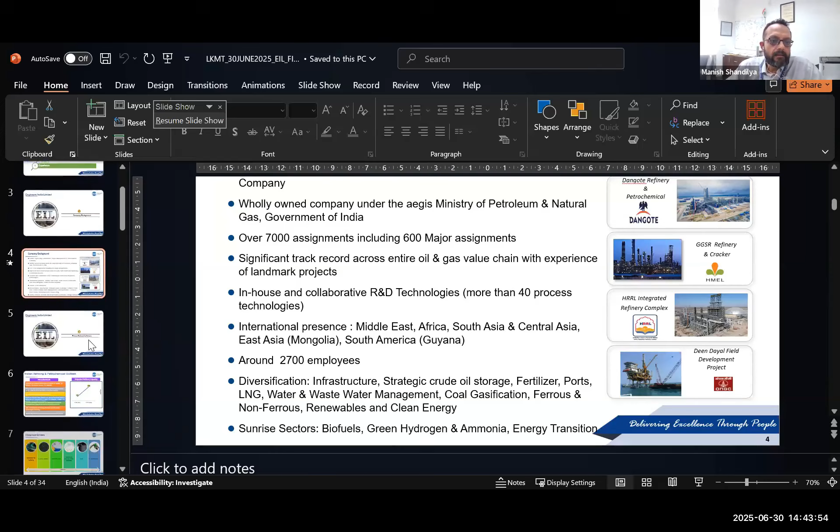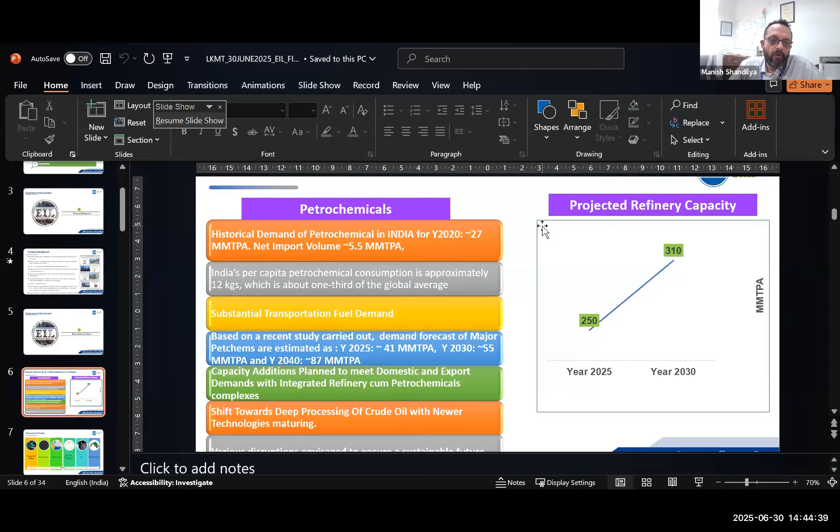So, a very brief perspective on the need for petrochemicals and refinery to come together. Historically, the demand for petrochemicals in India for the year 2020 is about 27 MMTPA. We are still at about 1/3 of the global average, which for us is about 12 kg. We still have a substantial transportation fuel demand, and we expect this petrochemical demand to jump from 27 to about 85-87 in the year 2040, for which capacity additions have been planned, are underway, or under study for domestic and export demands, as well as for the integrated refinery petrochemical complex. The shift is towards deeper processing of crude oil, and there are various disruptions being considered as part of our studies when we look towards a sustainable future.

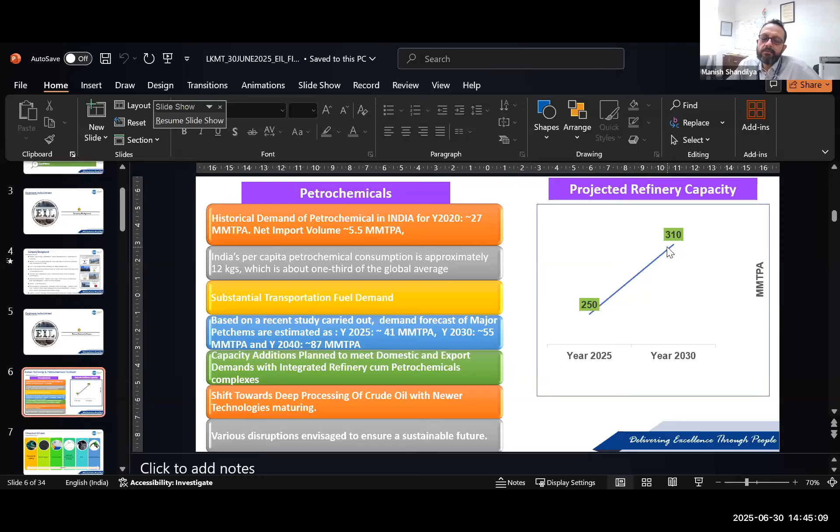As per the knowledge available with us right now, can you see that today we are almost at 250 million tons of crude throughput, and by year 2030 expected to be about 310, and there are projections for 2040 of about 400 MMTPA. And now, as the people in the industry are very well aware, besides the fuels, to make the refinery and the crude oil profitable, it needs an integration, or some petrochemical products have to come out because of the differential of the price.

So historically, the refineries were driven very early on by kerosene and fuels. Environmental aspects were always there. The crude prices were high. They are still so. There was a crude flexibility to be built in, and bottom of barrel was being addressed by the methods of coker, and before that visbreaker.

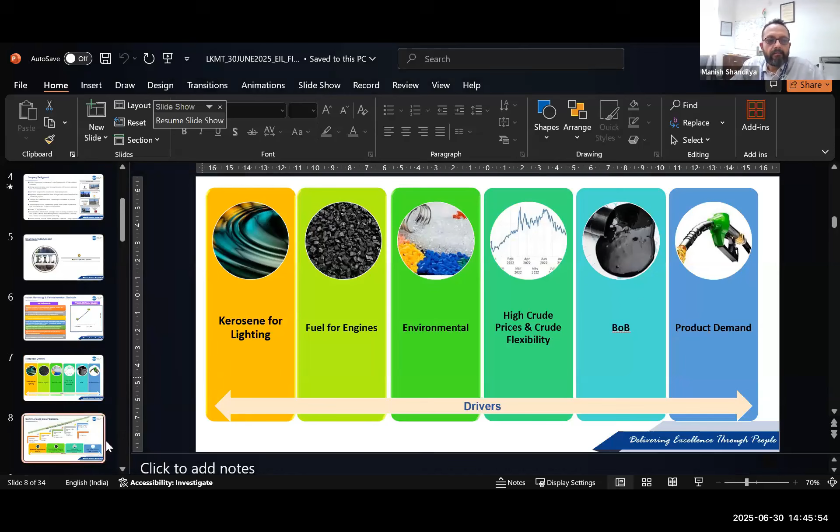Now, as things have moved ahead, we have moved away from visbreaker to delayed coker, two delayed cokers, petcoke going to the CFBC, then the delayed coker bottoms being connected to petchem, to petcoke gasification. Now we are looking for vacuum residue hydroprocessing, so that we can go as low as converting to a maximum of nearly 10% of the bottoms, or integrating it with the coker and still bringing it down to 10%. So these drivers are now the refiners nowadays, and in the coming years, targeting to eliminate high sulfur fuel oil. There are environmental concerns which are forcing the petcoke disposal options.

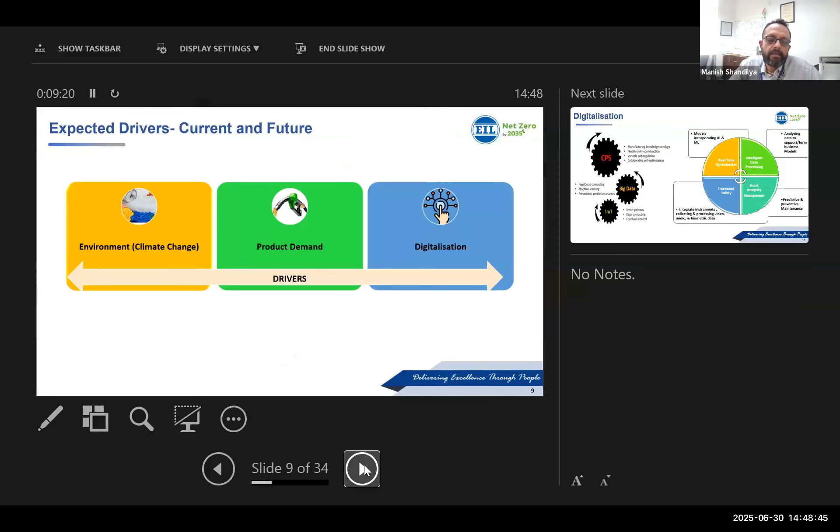There is an increase in petrochemical demand, and then again the prerequisite, the consideration of high crude prices and crude flexibility, is still there. So the expected drivers now, whenever we are configuring, are the environmental changes that are getting imposed, the product demand is altering, and there is a huge requirement of digitalization. The digitalization which is being built in right now is basically using real-time optimization, intelligent data processing, asset integrity management, and increased safety. So there is an increased incorporation of AI and ML models.

The projects that we are executing right now have a demand coming in from the client, and these are being done. There is an integration of instruments which leads to the collecting and processing of video, audio, and biometric data. And there is a built-in predictive and preventive maintenance. So these are the things which we take care of while we are configuring the current refineries.

Looking ahead in the future, increasingly the refiners are asking for utilization of green hydrogen, for carbon capture, for considering plastics into fuel oil as a feedstock, recycling, definitely integration of oil refining, and also the need of integrating biorefineries and utilization of renewable power. This is helping the refiners, besides being integrated with the chemicals, to become smarter, efficient, connected, more reliable, which brings better margins to them and increases sustainability.

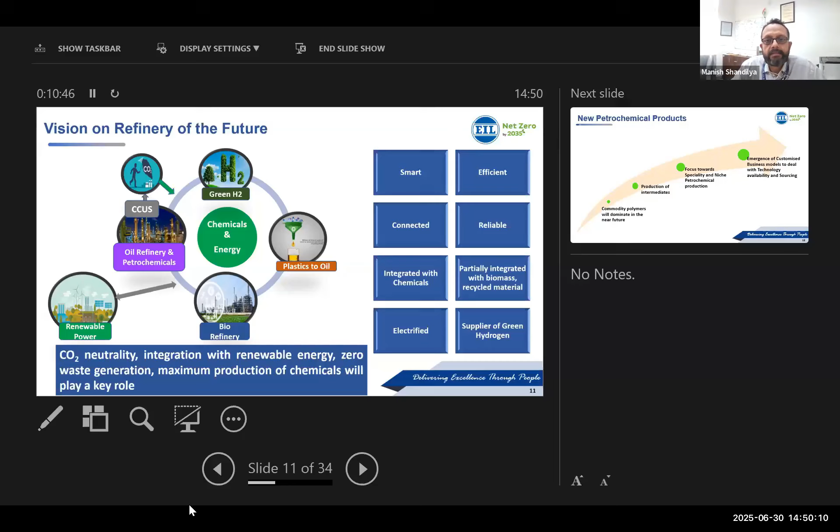Now, up till now, most of the companies were focusing on the bulks. Interest is being shown by the refiners to accommodate niche petrochemical production right away in the initial configurations, and the niche petrochemical production is bringing in the challenge of emergence of customized business models to deal with technology availability and sourcing. Not all technology suppliers who are in this business are willing to be a licensor. They want to be a participant, a part owner in one way or the other. And that is something which the refiners and the operators are increasingly having to deal with. Some of the refiners have already successfully incorporated these, and the new refiners are considering developing the systems in their organization to work with these environments.

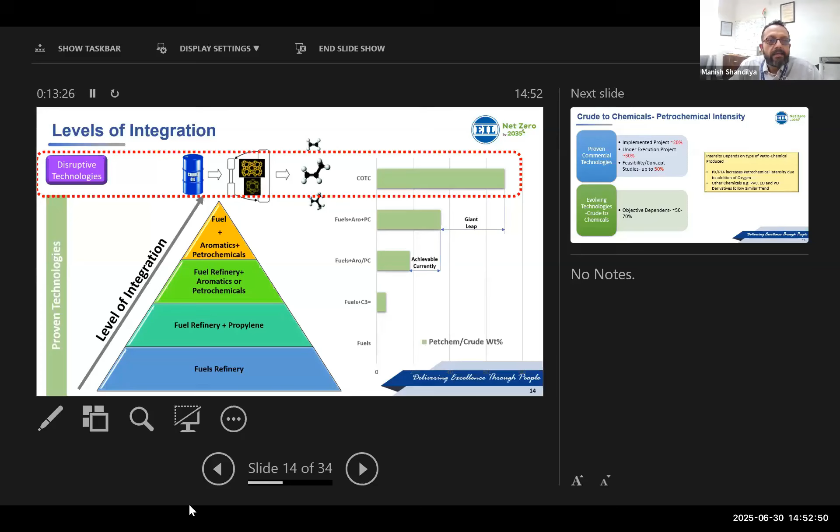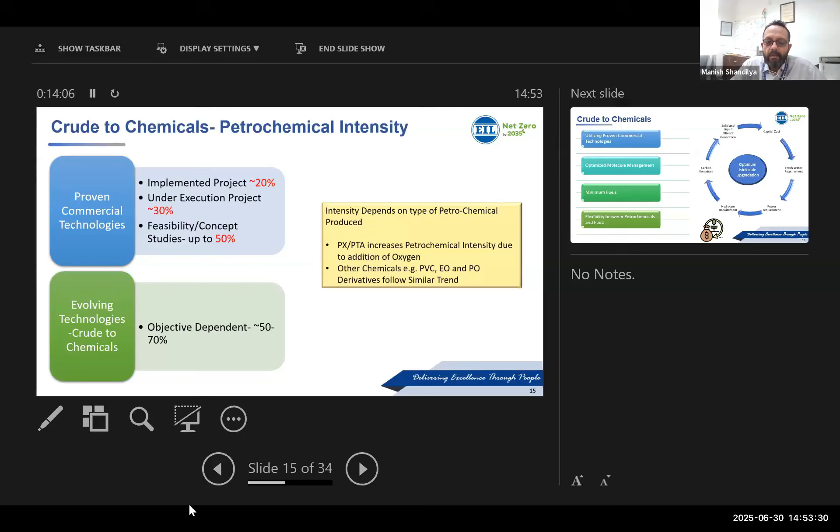So, in brief, the projects which we have implemented as EIL for petrochemical intensities are right up to 20%. They are already operating. More than 20 to 30%, they are under construction. The concept studies are going to 50%, and depending upon the objectives, we have tried to hit beyond 50 also. The intensity would depend upon the choice of the petrochemical that is considered. For example, PX-PTA. Other chemicals could be PVC, ethylene oxide, propylene oxides, which could also help in increasing the intensity much higher, in the realm of 50%.

So the way we go about doing it is utilizing thus far proven commercial technologies, optimizing the molecule management, minimizing the fuels, and still keeping the flexibility between petrochemicals and fuels, because there would be scenarios of shutdown, or downturns in the commercial cycles. And this requires the balancing of the capex, water management, power, hydrogen, carbon emissions, and the solid and liquid effluent generation. Once you integrate this, the capex rises substantially, which has to be very effectively managed to stay profitable by capturing or allocating the molecules properly.

So then there are two ways one can approach it. One is integrating it into an existing refinery or building up the refinery and petrochemical complex together. The moment one brings in the integration to an already standing refinery, there would be challenges like the processing of low carbon intensity residues. There would be integration of HGU and FCC. There are needs of converting the hydrogen, as the cracker is a big creator of hydrogen. So there would be hydrogen level integration, plastics to oil recycling, electrification of drives. Right now, there is contemplation of electrification of furnaces, though still at a demo stage.

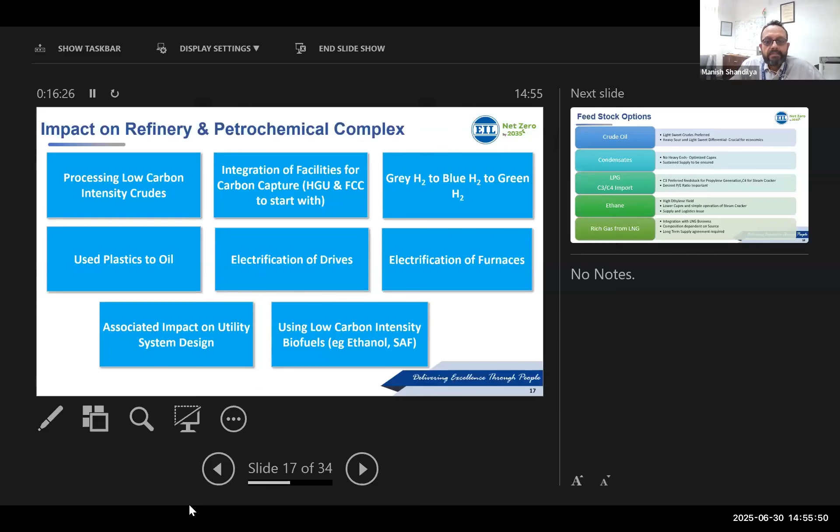So the feedstock options that get explored in this integration are, for example, starting with crude oil. The light sweet crudes are preferred. However, the heavy sour and light crude differential has to be built in for the economics. Condensates also; they do not bring the heavy ends, so the capex gets optimized, but the challenge comes from a sustained supply of condensates. LPG and C3, C4 would be the most preferred feedstock. However, again, it's the availability of these feedstocks which is a challenge, and hence the balancing of the P/E ratio in the cracker and the FCC has to be managed, because very rarely will it be possible to have a light cracker. More often than not, when we are integrating, we will be bringing in heavy streams like kero and diesel. So the design of the furnaces and choosing the right P/E ratio becomes important.

Interest has been shown by operators to bring in ethane directly, which gives the highest ethylene yield. But again, there is the consideration of supply and logistics, and though the operation of the cracker becomes simpler, this kind of cracker does require higher utilities compared to other crackers. The fourth option is the rich gas from LNG; there are already crackers operating in the country. This again requires the sourcing chain. So basically the message here is that the feed to the refinery starts changing. However, the refinery also has to satisfy its primary requirement of servicing the fuels demand. So that's a challenge wherein the design of the complex needs to have a wide spectrum, so that it can take care of the market economics while keeping itself profitable.

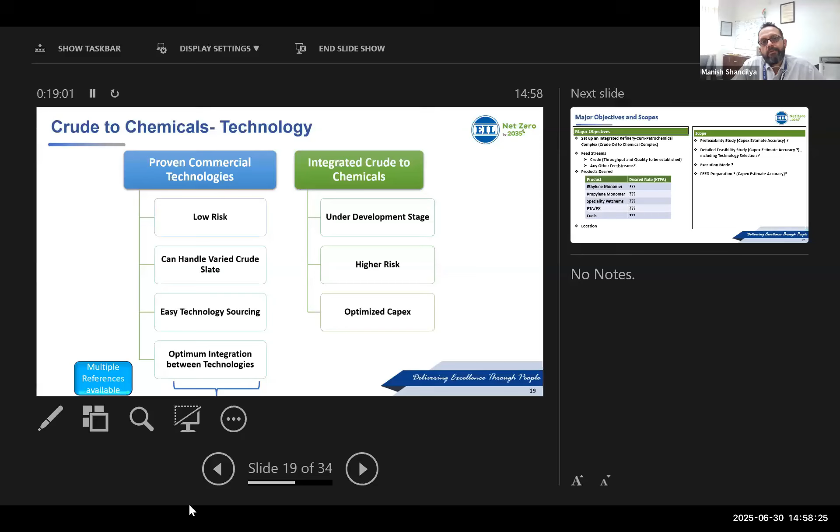However, there is a lot of interest in integrated crude to chemicals because it brings a much higher petrochemical intensity. For example, this is a very high-level template of what needs to be in an operator's mind, what bullet points have to be there. The first thing, obviously, is to set up an integrated refinery cum petrochemical complex, or to put a chemical complex onto a crude oil complex. Then the crude throughput and quality need to be iterated, and the diet has to be established.

Whether there are any other opportunity feed streams, for example naphtha, LPG or ethane, that the refiner or operator can source. The products desired, the primary being ethylene and propylene monomer. Are there any specialty petchems on the horizon? Whether PTA or PX is a thought process, and one very important thing is what kind of fuels the refiner would like to service as a base demand.

The location becomes extremely important. We have seen operators moving to various locations, not just for fiscal incentives, but also to make the logistics of the incomings and outgoings favorable to the complex. Then come the stages it has to go through. Typically, it goes through a pre-feasibility stage. The capex estimate we have seen at this level could be as good as 30%. Some people have also opted for close to 50% for a pre-feasibility.

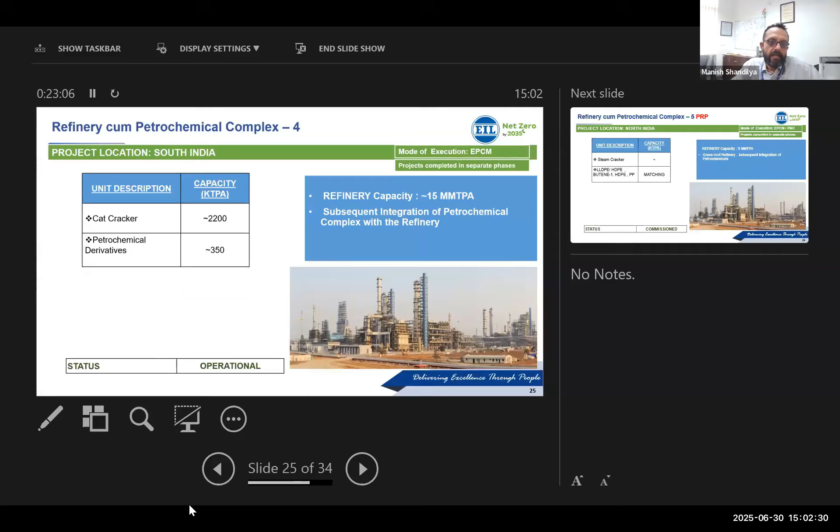Then there's a well-known petrochemical complex in the west of India that has been raised to 25% with a steam cracker of 1000. Here, the FCC and the steam cracker have been integrated with C2, C3 valorization, still focused on the bulks. And a complex in South India, where the cat cracker C3s, which traditionally go to PP, have been taken to petrochemical derivatives like oxo alcohols and acrylates. So these are projects in the 20 to 25% range.

EIL is presently engaged in studies which are greater than 30%, as well as hitting above 50%. These are at various feasibility levels right now, and are being done with conventional technologies, employing bulks as well as specialty and niche derivatives. These are only at the study stage. Some of them are at PFR, some at DFR, and some have progressed to technology selection. So in a year or so, we'll probably be talking about BDEPs in a few of them.

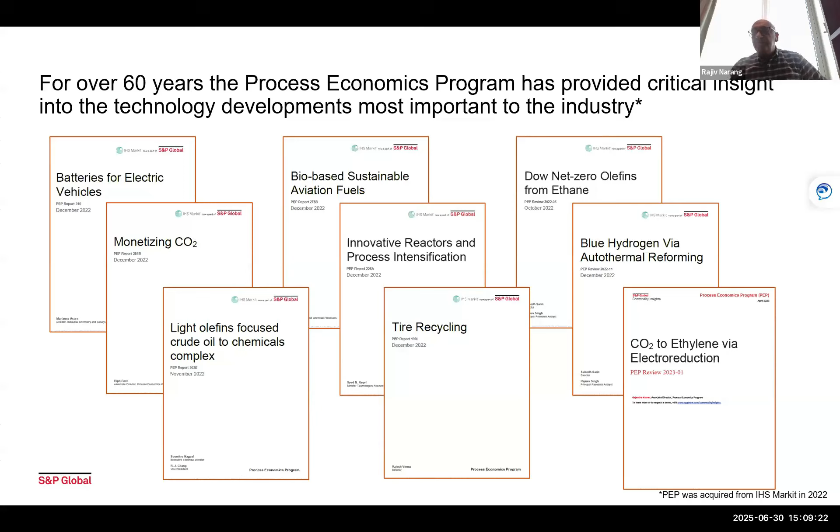And it has got over 2,100 processes in its inventory. So that's always interesting too.

Okay, I'm going to minimize my screen. I have a small screen. So Ajay, please flag it up if something goes wrong.

SMR, small modular reactors, carbon capture mineralization, and efficiency of a particular plant, and why we should be looking at this as low hanging fruit. Now this is not really disruptive, but I think it's important from the point of view of public policy. But every technology in the various boxes is important. The big message is there is no one silver bullet to decarbonize a plant.

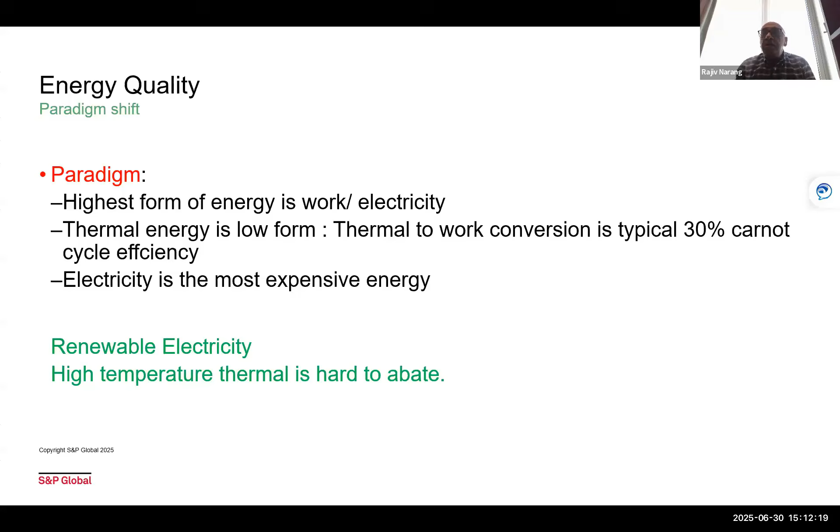And the second paradigm shift is high temperature thermal is hard to abate. We can see that in cokers, in crackers, in hydrogen reformers. What is stopping us is actually the high temperature thermal heat. Electricity has still not made its way out there, but it is trying to. And here is an example. Electrification of crackers is under development, is what we have found out.

The people who are working in this field are given on the right-hand side: Linde, Shell/Dow, Technip. And the most interesting to us is the Coolbrook rotating cracker, rotodynamic reactor technology, which is in pilot scale. But what I would like to point out is, if you look at the electric furnaces, that's more than half a gigawatt, so 600 megawatts.

And we still have to do some fuel firing of 74 megawatts. And all this is renewable electricity. This is for a 1 million TPA ethylene plant. For a 1.5 million TPA ethylene plant, typically you need a gigawatt of electricity, which has to be renewable and has to be robust 24/7. And that, I think, is a big challenge sitting with us.

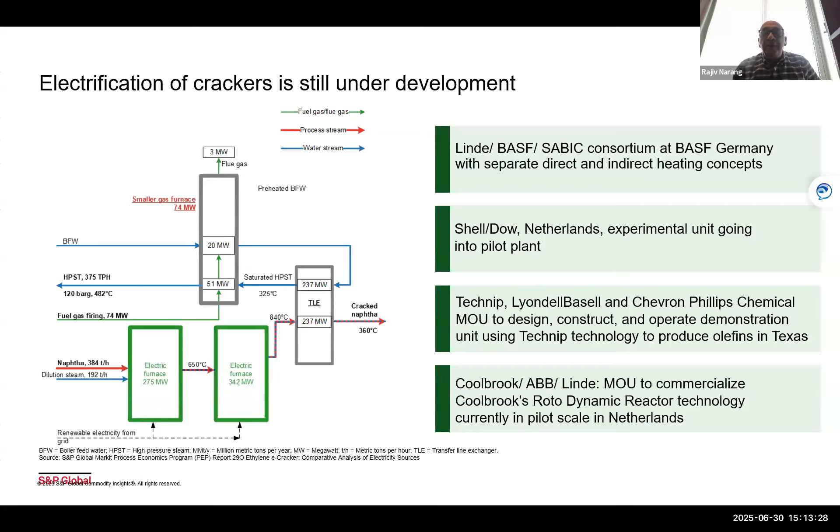So talking about efficiency, the first technology, and I'm cheating here. It's not really disruptive. But I think it needs help, and it works together with renewable electricity, which is claimed to be plentiful and cheap. Why would anyone spend money to change a compressor? The typical highest consuming rotating machinery in a plant is a compressor. It runs in megawatts mostly, pumps probably in kilowatts.

And why would I want to change a compressor from, say, steam running today to a variable speed electrical with a very high efficiency? The only way I can do this is if somebody puts a carbon price on it. The price of carbon has not yet been put in many countries, except maybe in Europe, where we have a carbon trading scheme, and maybe South Korea. If we put a carbon price on the CO2, or we legislate it like we did for sulfur, we just said not more than 10 ppm in gasoline, and that's it. Anything else can be gamed.

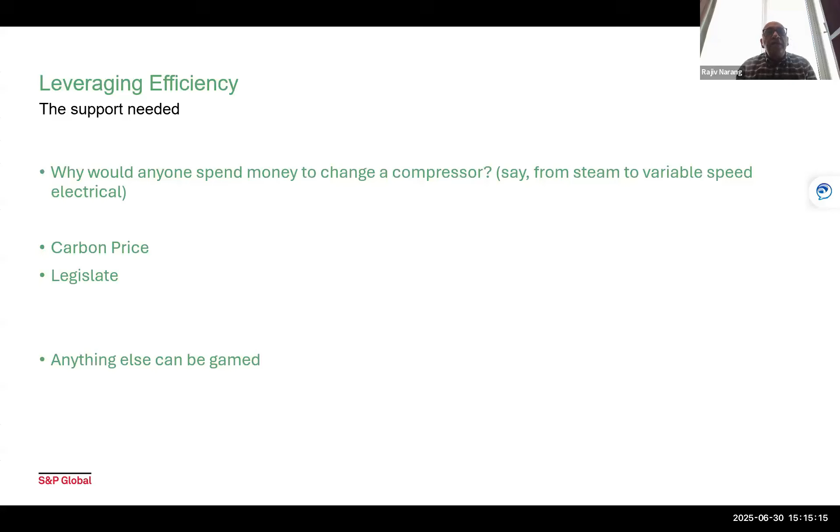And this is what we have observed. There's a lot of subsidy harvesting happening all over the world. There is no forcing the issue either from public policy or from the legislatures. Subsidies, yes. Carbon trading, yes, it can happen. But really, we need to force the issue now to make even a simple thing like efficiency viable. The second one I want to put on is a small modular reactor. This is nuclear reactors, not chemical reactors.

They are manufactured in fab shops, and they overcome some of the disadvantages of large gigawatt kind of reactors like Vogtle AP1000, which was delayed by many years, and the cost went up by almost 3 or 4 times.

With SMRs, multiple modules can be installed to increase the output. The low thermal power of a module enables passive safety features. This is the most important thing, because they are inherently safer. When they can look after themselves, they are walk-away safe. One of the big critics of nuclear is actually the safety angle, and justifiably so.

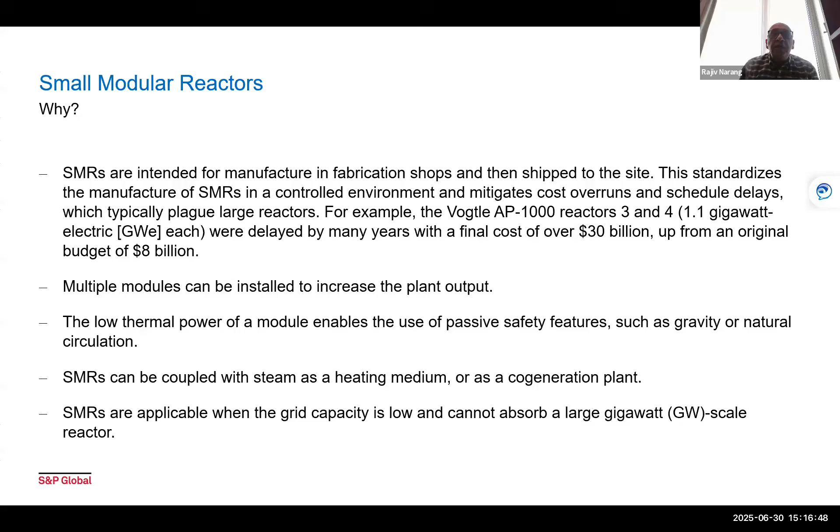So SMR counters that to a large extent. Of course, you can couple an SMR with steam as heating medium or as a cogeneration plant, and it's very useful where we want to link it up with a grid that cannot absorb a gigawatt scale plant. The policies of most companies say one single source cannot be more than 20 or 30% of the local grid, so a large nuclear plant has difficulty hooking up to that grid.

There are the following technologies acknowledged by IAEA: the water-cooled one, which is the most common technology even in large reactors; the high temperature gas cooled, that's very interesting, and in the next slide I'll show you why; the fast neutron spectrum; the molten salt, also very interesting; and then there are lab scale micro reactors.

Here's the difference: PWR is pressurized water reactor, BWR is boiling water reactor, high temperature gas reactor, and sodium fast reactor. I'd like you to keep an eye on the last row, the secondary coolant. This is the heat we are extracting from the reactor. As you can see, the pressurized water reactor, the most common reactor, has a temperature limit of less than 300 degrees centigrade, which means it cannot satisfy the high temperature thermal heat needs of most process plants.

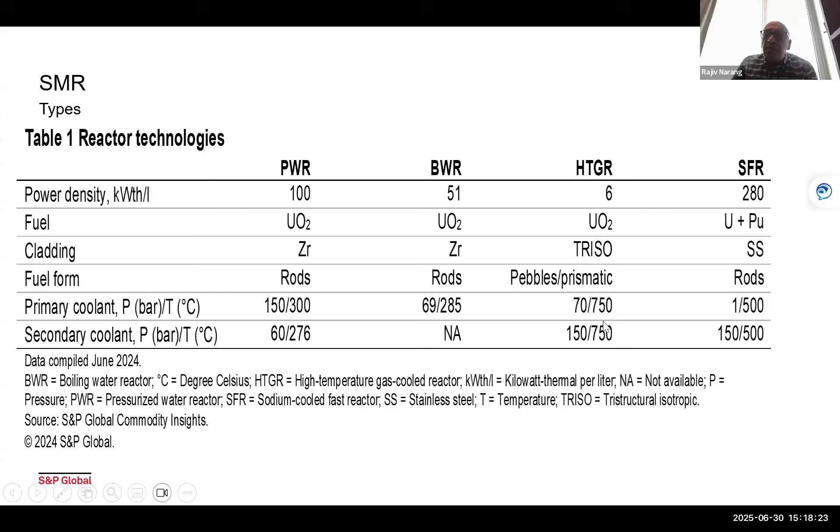Here is a pressurized water reactor, which is NuScale. You can see it's 77 megawatts electrical. You can hook up to 12 of them to make it 924 megawatts.

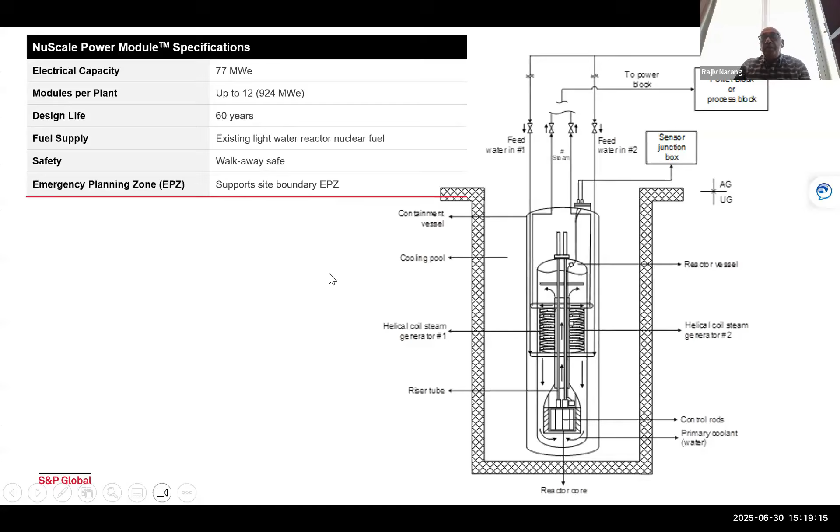Here is a challenge: 60 years is a challenge. Most plants we design in the chemical industry run for about 20 to 30 years, and then technology starts overcoming them. But this one is designed for 60 years, so it can probably run more than that. And it's walkaway safe, and more important, you can set it up right next to the plant and not in some remote area. That's the patent for NuScale's power module.

But what is the support it needs? Regulatory clearances - we have to crash the process of getting SMRs built right next to a refinery or a petrochemical plant. Safer designs need public buy-in. We need good PR. We need private players and government working in tandem.

Fuel supply in our book should not be a problem - it's traditional fuel supply, unless it's the newfound gas-cooled reactors where one really needs a special design for the fuels. And the last one, liability limitations. This has been a thing of contention between private players and governments, where we want to reduce the risk to private players. And this is important in another sense.

If you look at history, shale gas was not discovered by big players. It was small backyard players who actually discovered shale gas, which means in a country like US, where entrepreneurship is respected and protected to an extent, they could do it. We need a similar unshackling of entrepreneurship in India. After all, it is a lot of Indian people and Indian engineers who go to the US and are a big success, but not in India.

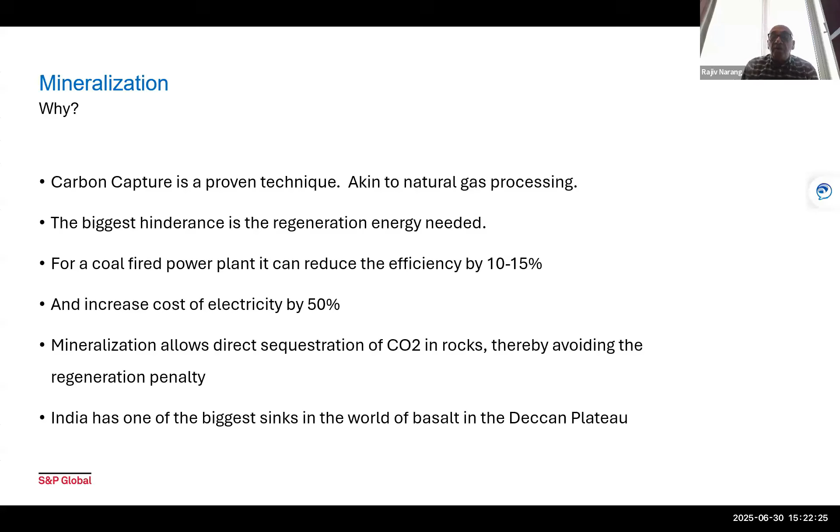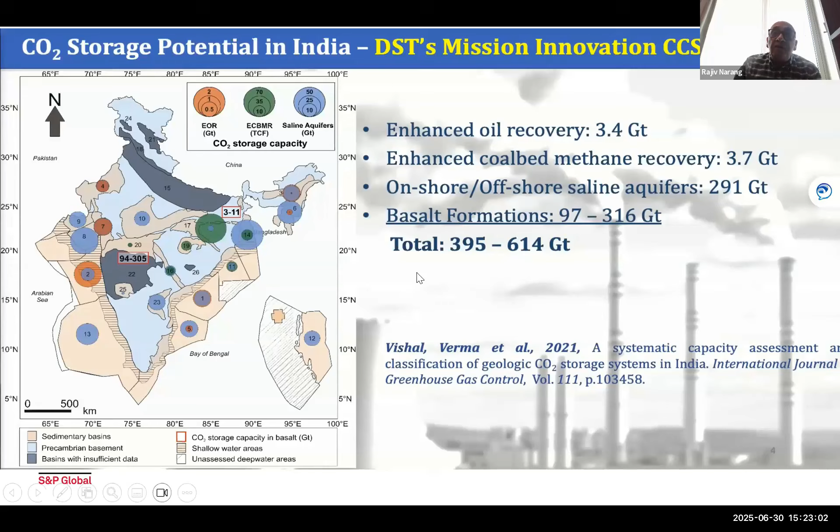And India has one of the biggest sinks of basalt in the Deccan Plateau. Here is a map of basalt and other CO2 sequestration sites. You can see in this region we have a large potential for straight away putting CO2 into basalt and mineralizing it for thousands of years.

So this is an advantage which India has, and that's another thing we really need our governments and policy people to help leverage mineralization by telling us who owns the pore space. In the US, the pore space is owned by the person who owns the surface, not in India. In India, anything below the surface still belongs to the government, which becomes an issue when you want to license it.

Again, liability limitation, we have to work with that. Once you have sequestered the CO2, private players need some kind of protection as to liability limitation in case something goes wrong and the CO2 comes out. Research, yes, we need a proof of concept, but I think IIT Bombay is already well on its way to that, and that's a plus point.

But again, we need to give private operators easy entry, which means we need to put a price on the carbon. Why would anybody put CO2 which is not producing anything of economic value to the society? Why would we do that? Why would anybody do that?

The reason is, if we put a price on CO2 and say I'm going to pay you this much, because then I'm going to load my main product, whatever I'm making, some plastics or something, with the carbon price which I'm going to pay you, then it's going to work. But unless that full chain is closed, this is not going to happen. So that's where policy comes in.

If you take a big one million ton per annum plant and say, I'm going to make a 1,000 ton per annum plant from that gaze, from that perspective, it's never going to work.

We have to start working from the bottom, saying, this is what we have, this is the feedstock we have, this is the contaminants it has, what can we do with it? And here is where both the engineers' and the policymakers' gaze needs to change.

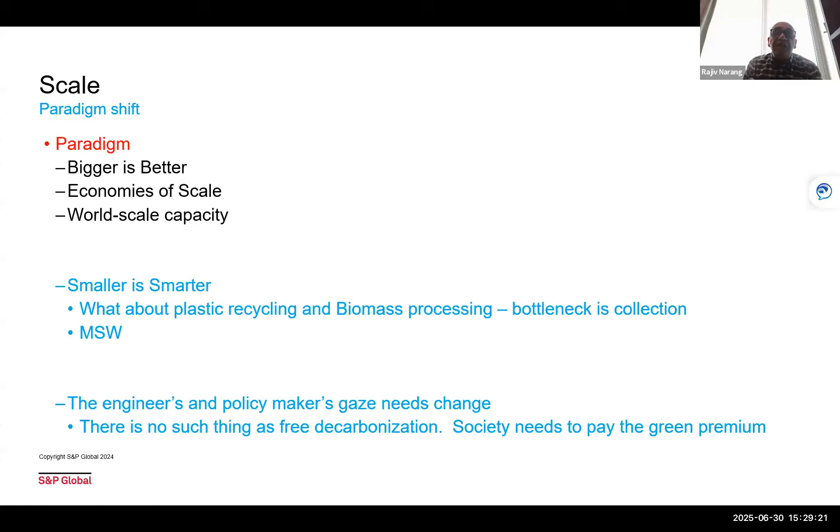My last message: there is no such thing as free decarbonization. Society needs to pay the green premium, and there is no soft way of saying this, no easy way of saying this. How much it needs to pay, that's where engineers and policymakers come in. We can look at technologies which minimize this pain, or as I call it, the path of least regrets. We can go down that path and we can first identify that path.

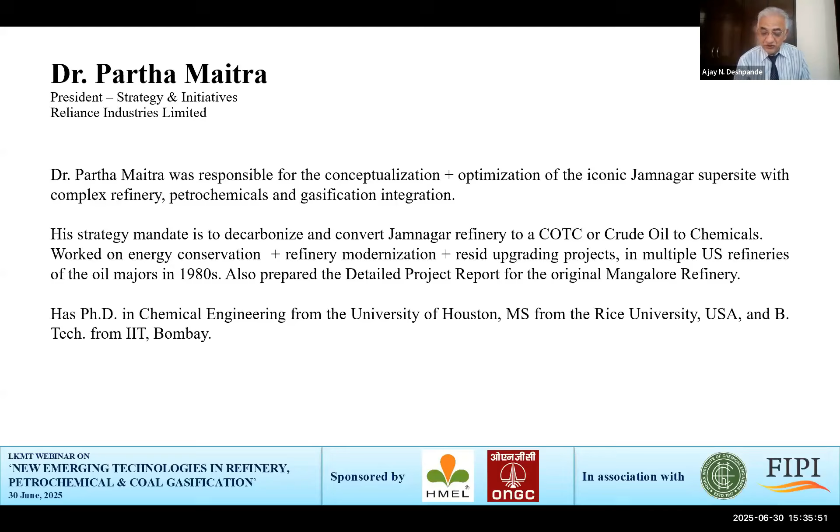His strategy and mandate is to decarbonize and convert the Jamnagar refinery to a COTC, that is crude oil to chemicals venture. He has worked on energy conservation, refinery modernization and resid upgradation projects in many US refineries before he came to India and joined Reliance. He is a PhD in chemical engineering from the University of Houston and a graduate of IIT Bombay. So, Dr. Maitra, over to you. Thank you very much for those very kind words and introduction.

Can I see the first slide, please? Yes. So we are talking of the future of olefins, and there is a reason why we selected olefins: olefins is the number one petrochemical in the world. So if we can figure out what happens to olefins, we can figure out what happens to other chemicals as well. Next slide. I am speaking not on behalf of Reliance, but in my personal capacity. That's the disclaimer. Next slide.

My topic will first introduce why we are even talking about the future of olefins. Next, we will talk about how we go for low emission olefins: electrification, feed optimization, and circular feed. We can do one or more, but basically these are the means to reduce the carbon intensity of olefins. And in future, we have to go towards zero emission olefins. We'll talk about H cracker, E cracker, R cracker, and finally EDH, which is ethane dehydrogenation. And finally, we'll draw some conclusions.

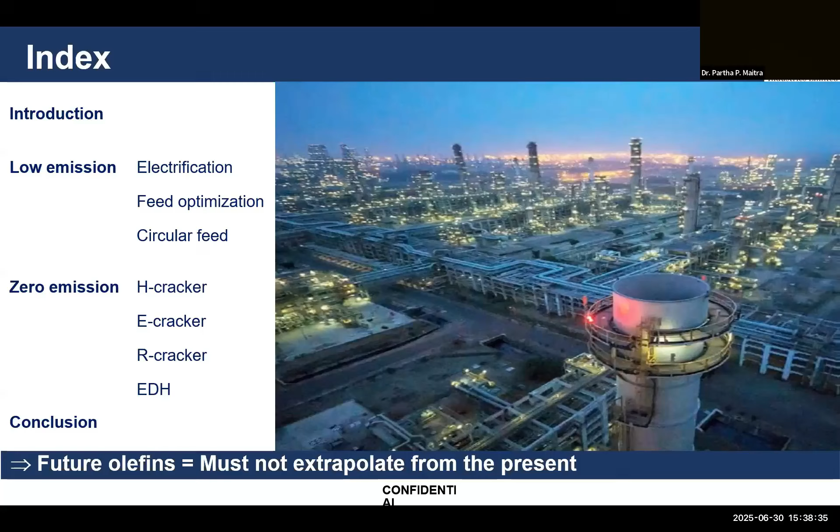So let's understand why we are talking on the future of olefins. Olefins is a major petrochemical intermediate. A number of petrochemical products are made from olefins. Ethylene is the #1 chemical by volume, and if you combine ethylene and propylene, they are the biggest building blocks for the global petrochemical industry.

The technology, I think every one of you know, is steam cracking. There are also some other technologies to make olefins. There is MTO, methanol to olefins. There is PDH, which is propane dehydrogenation. And there is also FCC, mainly to make lots of propylene. But at the end of the day, the real workhorse is steam cracking.

Now, why are we talking about future? Because steam cracking, unfortunately, has very high energy consumption. As a result, they have very high emissions, and they are not fit for net zero. So if the world is gradually moving towards net zero, today's steam cracker does not fit the bill. And hence, we require something else in order to get sustainable olefins. That's why I repeat, the past will not be the same as the future.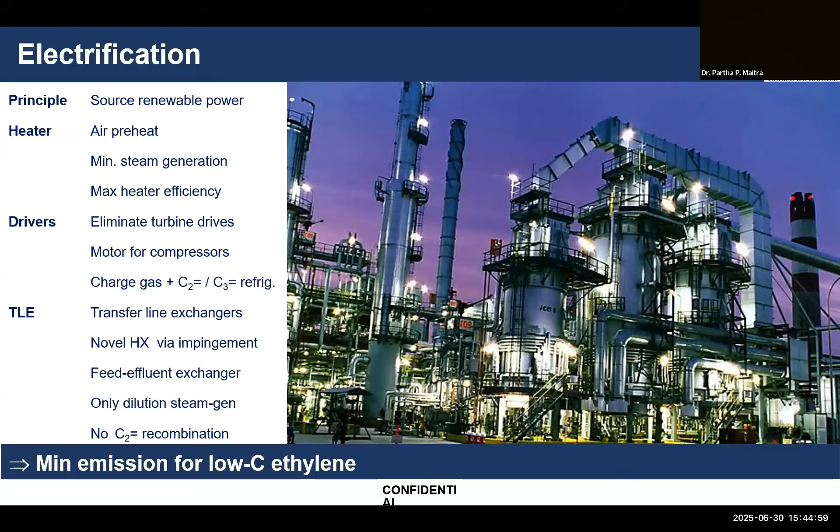feed optimization. Now, today, in India, it is extremely common. You want olefins, put up a naphtha cracker. I think we should re-evaluate that paradigm. The optimum feed is C2 and not naphtha. In fact, it is better to hydrocrack naphtha to C2 and C3 in order to optimize the feed, because I'm sure people will ask, we don't have C2, what do we do? Now, we feed C2 in the steam cracker, we feed C3 in the PDH, because in the future, efficiency will become paramount, and whichever has the highest ethylene or propylene yields should be used for future olefins.

Now, actually, all refineries have C2 and C3, but unfortunately, most refineries do not have a refinery off-gas cracker. They do not recover the C2 and C3 and merrily burn it as a fuel. So, what I'm saying is, in future olefins, do not burn the existing C2 and C3 as fuels, but recover it as a prize, a feedstock for olefins.

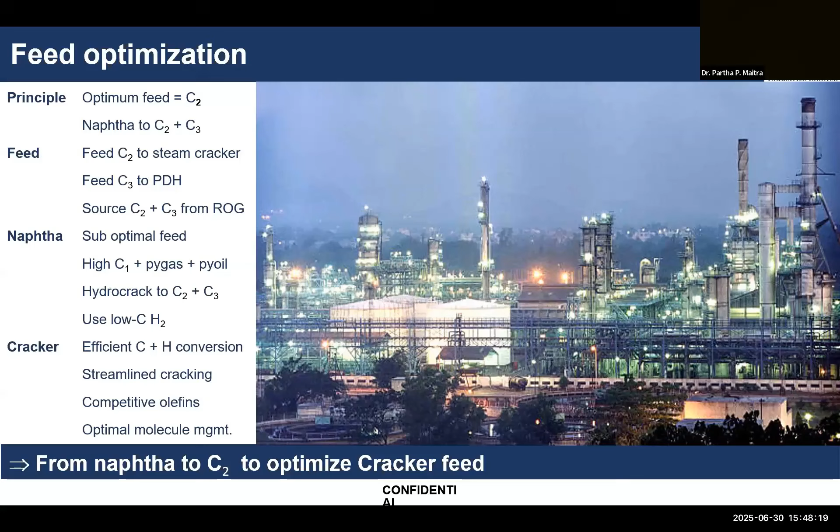It is streamlined cracking. In other words, it's a simple cracker, not with liquid feeds. We get what is known as competitive olefins, and most important, we will do optimal molecular management. So that is what is known as feed optimization.

Next. So the other is the circular feed. Now, I think in this, people have said we have lots of biomass. We can produce fuels from the biomass, but the question is, why don't we produce some high value petrochemicals? Similarly, for waste plastic, pyrolysis also can lead to steam cracker feed.

Now, there are some very interesting pyrolysis options which are available, especially for biomass or for waste plastic. And one of them in particular is supercritical water, which does not give tar in the pyrolysis. And it's worth looking at it if you want to have circular feed for your steam cracker.

Similarly, some of the pyrolysis, biomass and others, give, instead of liquid products, gaseous products which can be directly integrated into the steam cracker as a steam cracker feed. Of course, we have the conventional way of biomass to ethanol, and the ethanol can be dehydrated to ethylene.

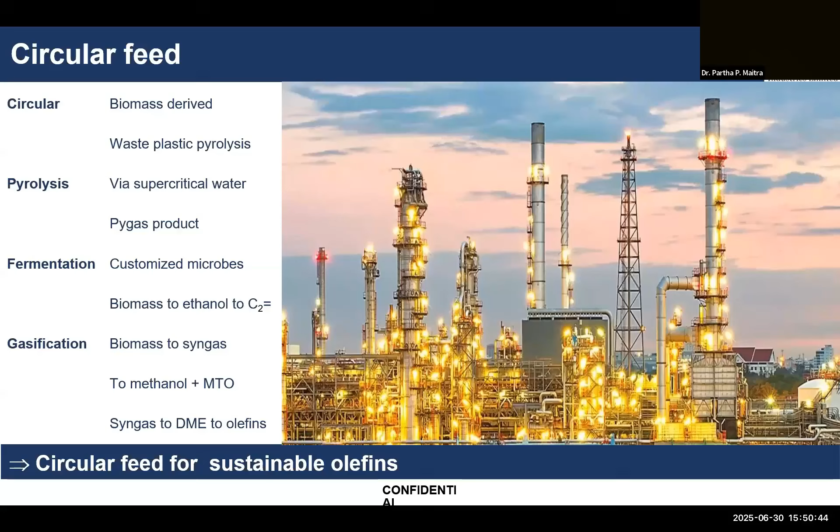So, to summarize, we need to electrify, we need to have what are called optimum feed to the steam cracker, and third is it is helpful if we can get circular feed to the steam cracker. So these are for existing steam crackers. Let's go to new steam crackers. And this was mentioned again by previous speakers. So there are three ways to go for a new steam cracker.

One is called the H cracker, where the low carbon hydrogen is used as a fuel for the cracker heater. How do we get this low carbon hydrogen? Now, if you have ethane as a feed to a steam cracker, the ethane produces C1 as a byproduct, and that C1 is sufficient via ATR or autothermal reforming and CCS, carbon capture and sequestration, to make hydrogen as a fuel for the steam cracker. Of course, it needs to be blue hydrogen.

Now, this doesn't mean that we are done if we just switch the fuel from methane or C1 to hydrogen. We still need to electrify, we still need to optimize the feed in order to eliminate the emissions. But a H cracker can be fit for net zero.

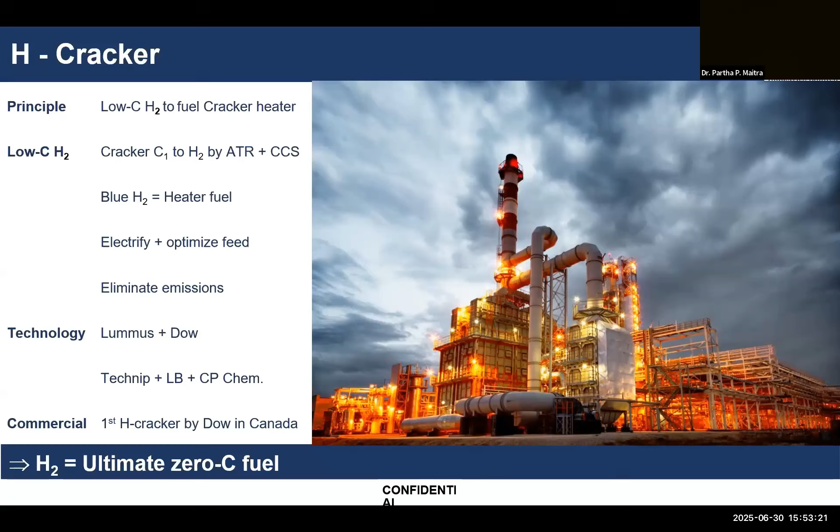Next is e-cracker, and this is electric heating. So, the rationale for this cracker is, if we have to convert electricity to hydrogen and then use hydrogen, why not use electricity directly as a cracker heating medium? So it is electric heating. Now, there are two ways of e-cracker.

The direct heating, where the coil, that is the pyrolysis coil within the steam cracker itself, is metallic and it can act as a heating element. So you don't have to heat the whole heater, but you only have to heat the coil so that the feed in the coil can be steam cracked to olefins.

The indirect is a very large toaster. Basically, you have coils in place of toast, and you have a heating element on both sides, and you heat up the coils uniformly so that it can crack into olefins. Now, the developer, it's BASF plus SABIC and Linde.

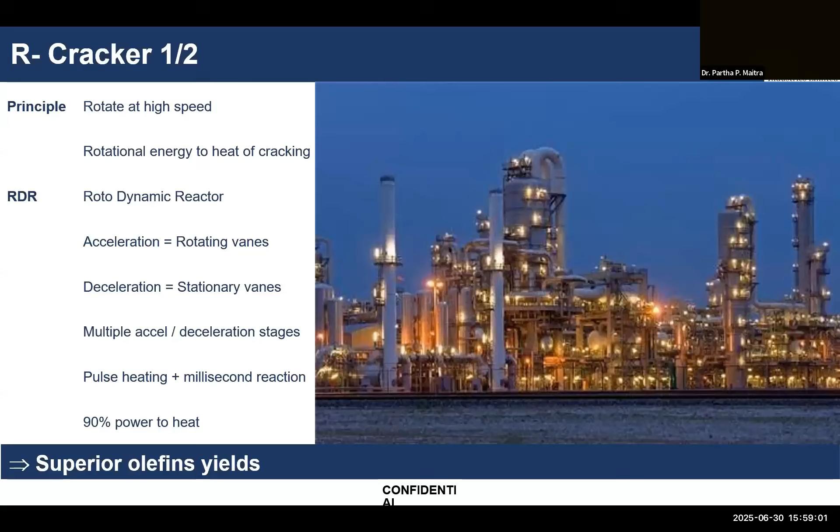And all of this happens by pulse heating with millisecond reaction. The total in this rotodynamic reactor heating is less than 100 milliseconds, and it gives absolutely excellent olefin yields. The more important thing is, unlike the e-cracker, 90% of the power in this case is converted to heat, thermal energy for cracking. So it has superior olefin yields, roughly 4 to 5% better than a conventional steam cracker for, let's say, C2 or naphtha cracking. Let's go to the next slide, please.

So the developer is the Coolbrook consortium, which is in the Netherlands. Their pilot has been spectacularly successful in 2024. The RDR, that is the rotating machinery, is supplied by ABB, formerly Asea Brown Boveri. So the advantages are superior yields, minimal coking, and simple maintenance. Actually, there is no coking within the rotating machinery; all coking is outside the RDR.

In the future, at the end of this year, they are working on the demo to convince people that it makes sense. And the first commercial will be end of '26 or beginning of '27. So if you are looking at future olefins, you should definitely think about the H cracker, the R cracker, and the E cracker. Next slide, please.

Now, everyone asked the question: if we can do propane dehydrogenation, why can we not do ethane dehydrogenation? Because EDH would be similar to PDH. So I have good news for those people who have been waiting anxiously for decades. We now have oxidative dehydrogenation. It is again by the same trio of BASF, SABIC, and Linde. It is at what is known as TRL9, that is, waiting to be commercialized.

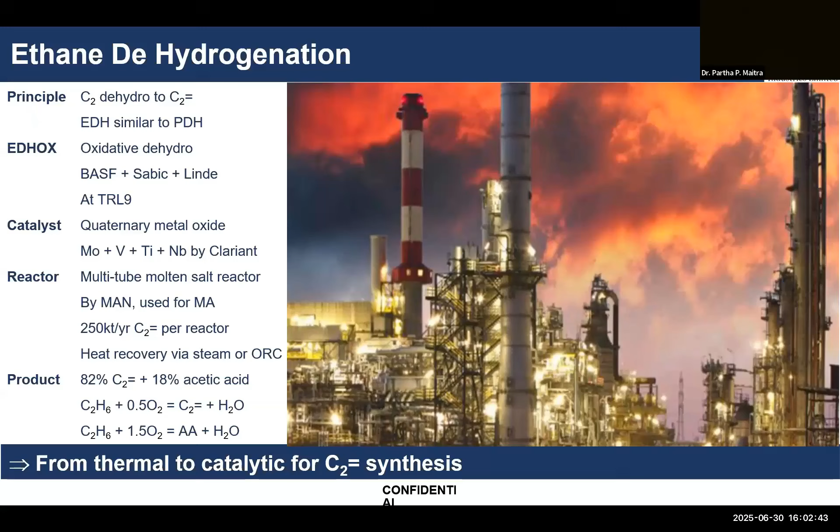And of course, you can do heat recovery. You can improve the efficiency in the molten salt reactor either by organic Rankine cycle, that is ORC, or via steam. Because it is oxidative, the product is 82% ethylene and 18% acetic acid. So if you are in the acetic acid business, it's a good deal. So that is another way for future olefins, or future ethylene. This is only ethylene. Next slide, please.

So this is the concluding slide. The steam cracker started its life in the 1950s. For 70 years it has had spectacular success, but unfortunately, it is not sustainable for the future. For existing steam crackers, we need to reduce emissions either by electrification or by optimal feed or circular feed, or we can expand by adding an EDH to an existing steam cracker. If you have to go for a new steam cracker, think about the H cracker, E cracker, and R cracker. Please evaluate and make the right decision.

And for the future, it's the sunset for the conventional steam cracker, but it is the sunrise for novel olefin technology. And there is transformative innovation coming for future olefins.

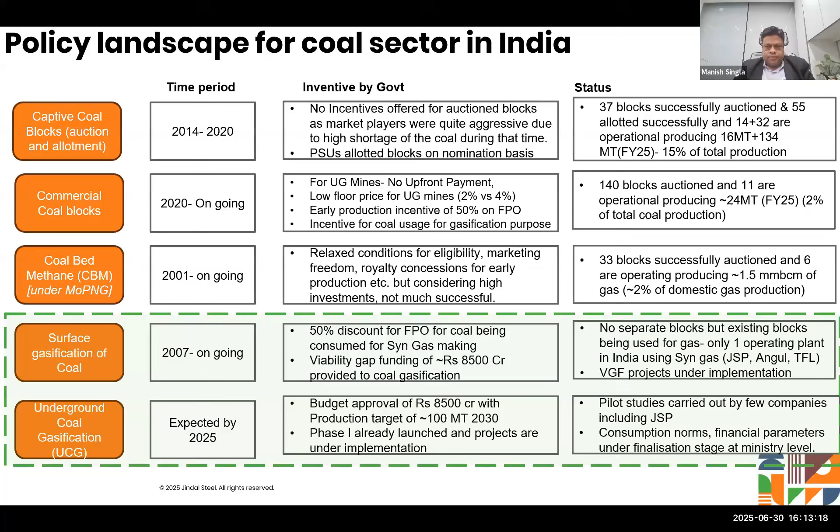Incentive-wise, the Ministry of Coal and other ministries have offered different incentives in different tranches for promoting coal gasification. In the commercial coal block auction, an incentive of 50% rebate on the final price offer is given if you use the coal specifically for gasification purposes. The ministry has also earmarked a budget of 8,500 crores, which I will discuss in subsequent slides.

Coal gasification is a compulsion for India, given India's commitments in COP21, COP26, and COP29 - we have to decrease our carbon footprint. As you know, of the coal being used, almost 80% goes into power, and around 10 to 15% into the steel sector. The steel sector is also a very carbon-generating sector, other than power and cement. That's why if coal gasification can free some capacity for steel making, using syngas for DRI, that can reduce some of the carbon footprint.

The introduction of coal gasification is a technological process in which partial oxidation of coal happens to generate a mixture of gases - syngas, synthetic gas, producer gas - which comprises mainly CO and hydrogen. The gasification advantage is that it is a cleaner option compared to any other option being used.

The coal is abundantly available in India, especially the coal which is below 300 meters. A few technological plants are already operating in India, like JSP Angul, and a few other plants are under different implementation stages. For underground coal gasification, there is an additional advantage over surface coal gasification: there's no need for coal to be mined, no need for ash handling, no need for coal transportation, etc.

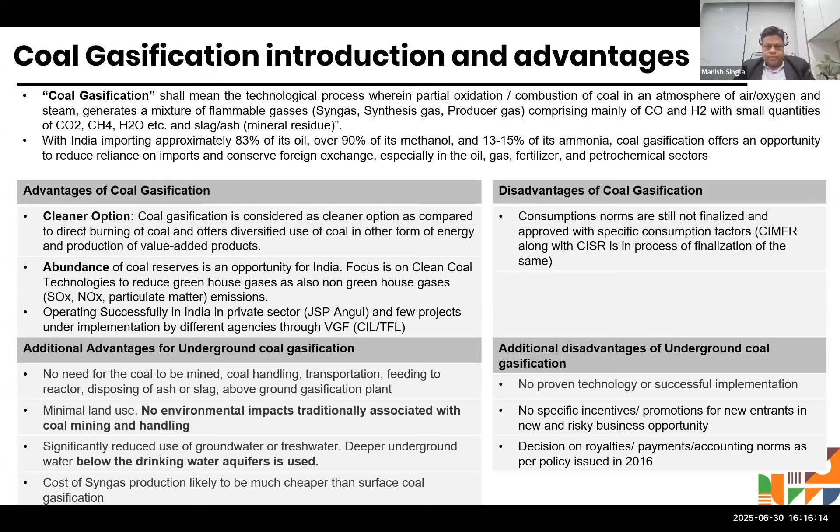In terms of potential, out of 378 billion tons of coal resources, around 200 billion tons are already proved resources, and of that almost 46% is deep-seated, meaning greater than 300 meters. So if we say less than 300 meters is generally open cast coal mines, we are doing almost 97 to 98% open cast mining. But at the same time, we are not doing much on underground coal gasification, and that is why there is a lot of potential to mine the coal below 300 meters and use that for coal gasification.

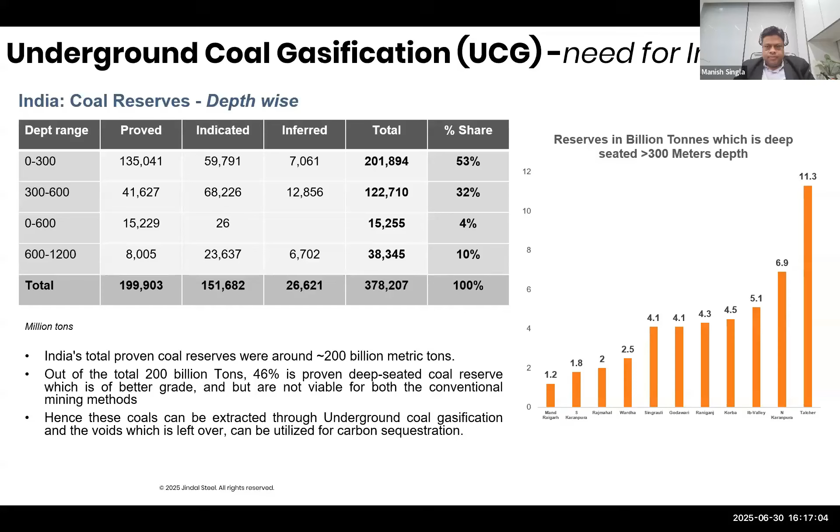So this is the first successful VGF in the coal sector which has happened. The ministry, Dr. Piyush Kumar, who was on the committee of this coal gasification, has mentioned there is a target to use 100 million tons of coal for coal gasification. 10 million tons was for pilot projects, and the remaining 90% for commercial coal operations.

The ministry has come up with a budget of almost 8,500 crores, out of which almost 4,700 crore has been earmarked through viability gap funding to different companies, triggering investment of almost 40,000 crores across different states. The biggest chunk is received by PSU companies like Bharat Coal Gasification and the Coal India-GAIL joint venture, which got almost 2,700 crores of funding and are spending 27,000 crores on projects using this funding.

Under category 2, which was for the private sector as well as government PSUs, 3 companies—mainly JSPL, New Era, and Greta Energy—got funding of almost 2,000 crores, triggering investment of roughly 20,000 crores. The third category was for pilot projects, for which 600 crores was earmarked, but none of the bidders applied for pilot projects.

So these 3 plus 2, 5 projects, agreements are already started, and these are at different stages of construction as well as implementation. We are hoping that after this policy, the trigger on investment in terms of coal gasification will start, and it will make many other projects viable. We are also hoping that on similar lines, a special fund will be given for underground coal gasification as well.

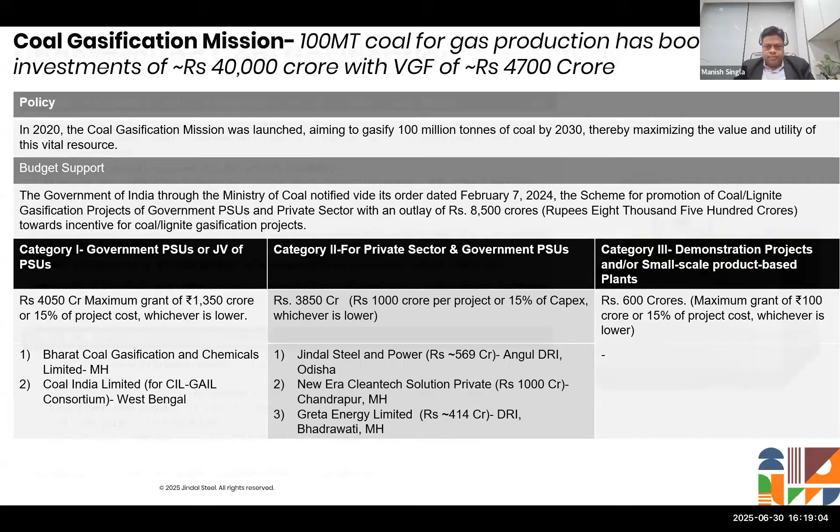For underground coal gasification, as you are aware, the first stage is pilot study, and after this, commercial implementation of that study. When I say pilot study, it means coal gasification is very, very site specific. We have to select the site, we have to see the grade, and in coal in India, there are different seams. Every seam has a different grade, and every grade has different ash content, which becomes very challenging for using some process constant for each type of coal.

That's why a few projects are already under pilot study. JPL has conducted a pilot study for Gare Palma Sector 1 coal block in Chhattisgarh—the pilot study is already completed, and results in terms of technical ground are encouraging. There are other pilot projects ongoing, like Coal India's underground coal gasification in Kasta coal block, Jharkhand.

GMDC is also planning some underground coal gasification for their coal blocks. Tata Steel is also doing this, and there are other private companies in the news like Vedanta or maybe Adani, also doing a few pilot study projects to enter into this space.

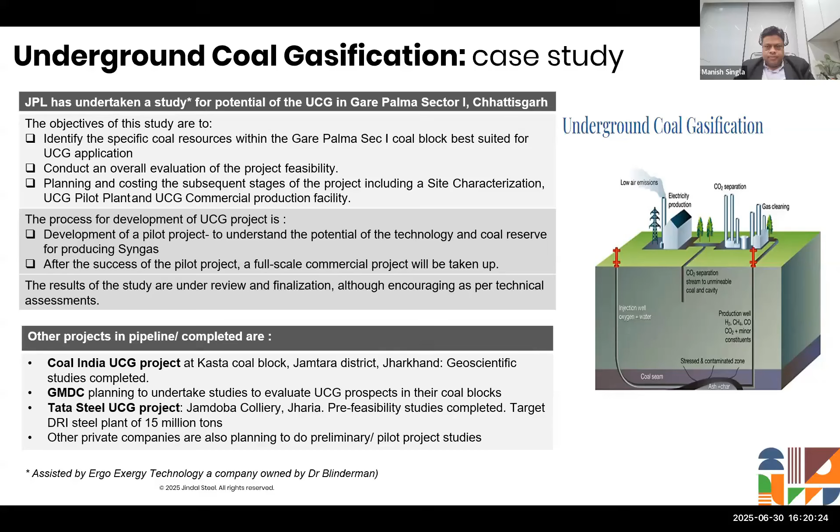So we expect the government to kickstart the auction of coal gasification along with funding, on similar lines to the VGF given, as well as rebates in terms of royalty. It should not be treated like similar operations to oil and gas blocks—coal is a very, very different commodity compared to oil and gas.

And that's why the underground coal gasification should be incentivized, as this is a very high risk-taking capability in terms of project capex—very high project capex. Returns come after 6 to 7 years if the project is successful, and there is no successful technology implemented in India as of now. With these closing remarks, I am hoping that the Ministry of Coal will come up with coal block auctions, especially earmarked for coal gasification, in the near future, in the next 2 to 3 years. Thank you very much.

Thank you, Manishji. I think that was a very comprehensive overview of the coal gasification initiatives being taken up, as well as those yet to be taken up for underground coal gasification. We definitely find that the thrust on surface coal gasification has started with the two initiatives already taken up, and funding has also been agreed to with different companies. We also expect that underground coal gasification will come up gradually in due course.

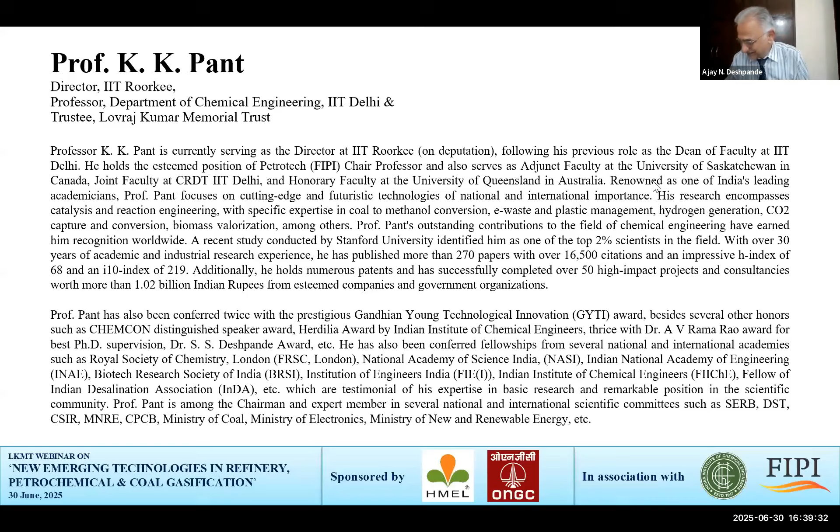Thank you for providing me the opportunity. First of all, on behalf of Lovraj Kumar Memorial Trust, I take pleasure in thanking all the speakers who have given their time and wonderful lectures, and the thought process which has come through. I would also like to thank HMEL and ONGC for supporting this webinar.

Having said that, if I just talk briefly about what Mr. Vaidya has talked about, the need for plasma gasification, how R&D is already being done. But if you do some kind of energy analysis for this plasma gasification, then we can work on this.

And this is very important because when you talk about the, say, MSW gasification through plasma approach, and when you do this plasma or supercritical, there is another approach where supercritical can also be tested. Although presently it is energy intensive, I think there is a way if we can do it effectively, and I think academia and industrial collaboration is required, where we can talk about the plastic, biomass, and even the crude oil, that is the heavy crude like HGO, VGO, can be mixed with that, and that kind of R&D should be done.

And thank you, Mr. Vaidya, for nicely explaining the concept of underground gasification, coal gasification, and also the critical mineral, because there is a need to extract these kind of critical minerals from the coal itself or fly ash itself. I think the ministry is also supporting this activity on the critical mineral mission, because India is importing 100% of these kind of critical minerals or rare earth, which would be the need of the future. Thank you, Mr. Vaidya, for this.

Good morning. Just getting ready to fly to office. I work for ONGC and I am an energy soldier. They are those who serve the nation in a different uniform, against different odds, on a different platform. These are the energy soldiers of India.

Over 26,000 dedicated souls of ONGC, devoting themselves every day for fulfilling the rising energy aspirations of 1.42 billion Indians and bringing India to the world energy map. India's leading company in the field of oil and gas exploration and production, geosciences, renewables, has its presence across the entire hydrocarbon value chain.

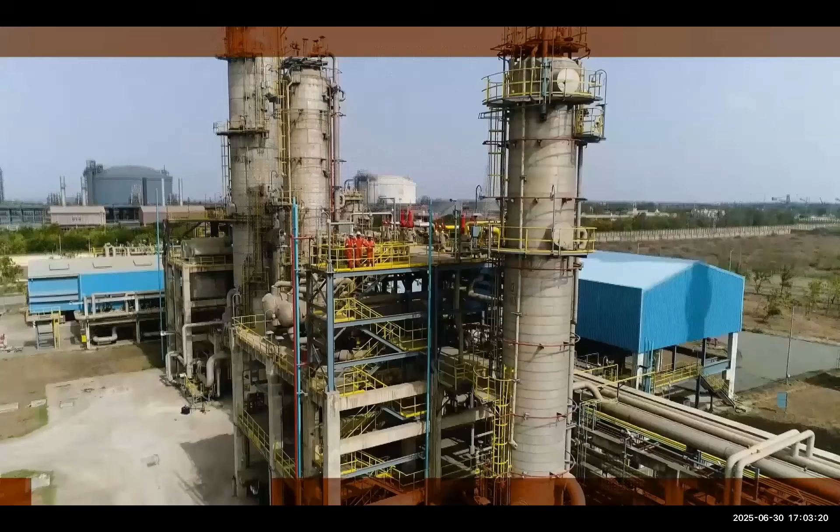ONGC is a Maharatna, creating immense wealth for the nation. Investing heavily in green energies, ONGC's efforts are an integral part of India's future roadmap, which includes discovering opportunities in renewable energy and low-carbon sectors.

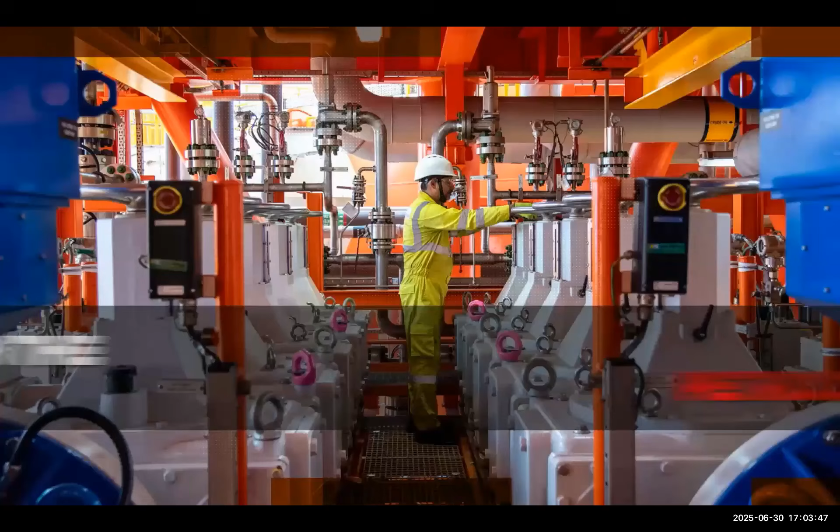It is always exploring and adopting latest technologies, offering numerous opportunities to grow, which empowers projects to transform a significant portion, ranging from 40% to 60% of the feed crude into chemicals, enabling the nation to meet its petrochemicals demand. Fostering a great work culture, ONGC offers not only a great work environment, but also the best compensation packages in the industry.

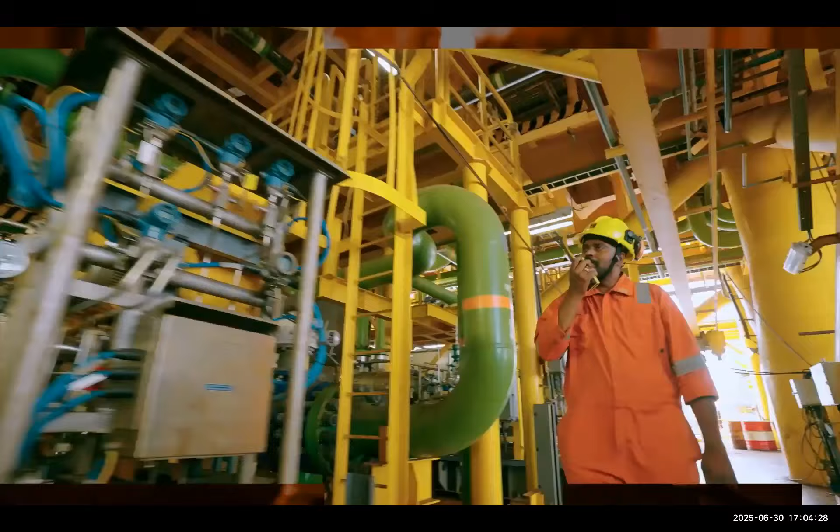ONGC is not just among India's best places to work in. It's a place that believes that best has no gender. It's why gender equality is paramount and sacred to us, as is the feeling of truly belonging to a family, bound together by a value system that encourages and enables us all to achieve our best.

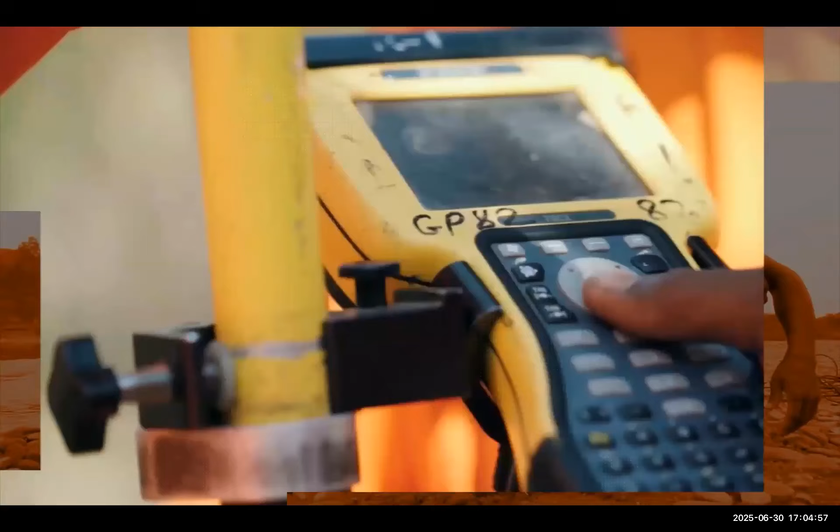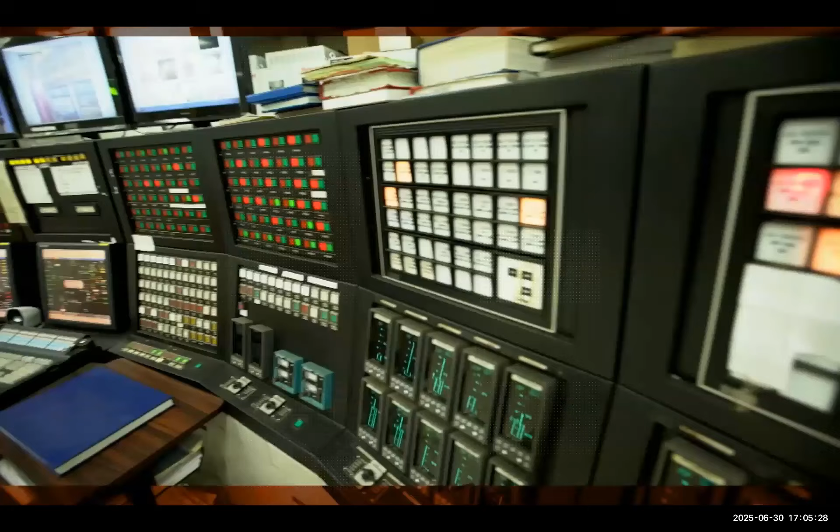A best that is nurtured by challenging ourselves even beyond the workplace. From exploring deep seas to scaling the top of Mount Everest, ONGC knows no boundaries. We are ONGC, India's most prosperous energy enterprise, with overseas footprints in 15 countries, where human excellence meets cutting-edge technology, where a progressive work environment promotes inclusion and equality,

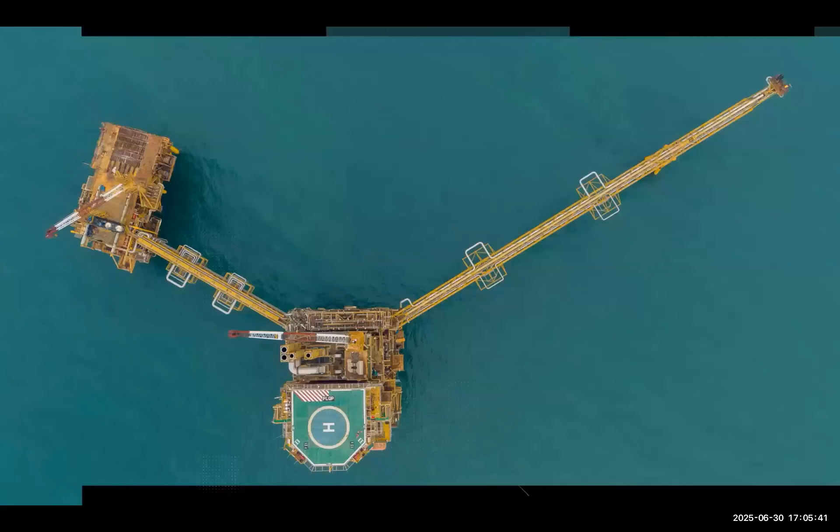where interdisciplinary experience keeps work ever interesting, where a 7-decade track record of amazing the world with successful oil and gas exploration programs inspires everyone to go ever higher. If you are young, passionate, dedicated, zealous, explore the many opportunities at ONGC. Be part of a legacy that's always making history. Embark on a career that will instill a sense of pride throughout your life.

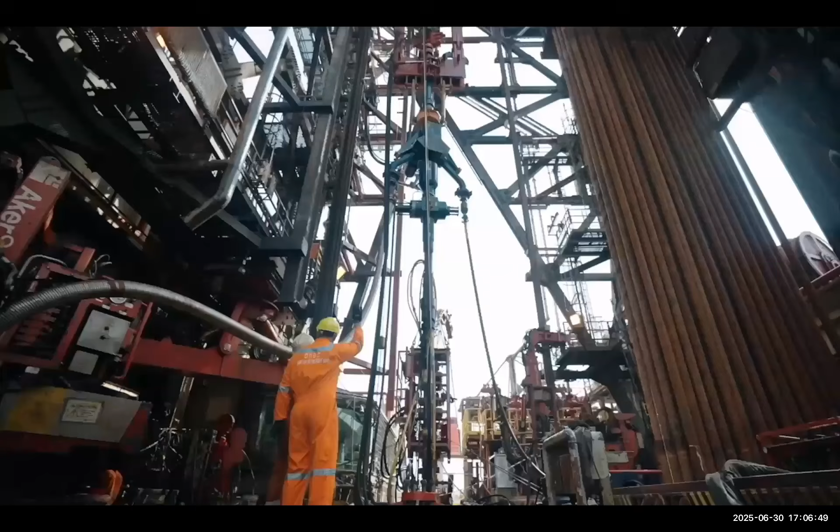Come, be India's energy. Let's together build our nation. India, among the biggest energy consuming nations, its appetite for energy is growing at a pace with its strong growth trajectory. Fast-paced development also means that the responsible nation contributes to a prosperous Indian society.

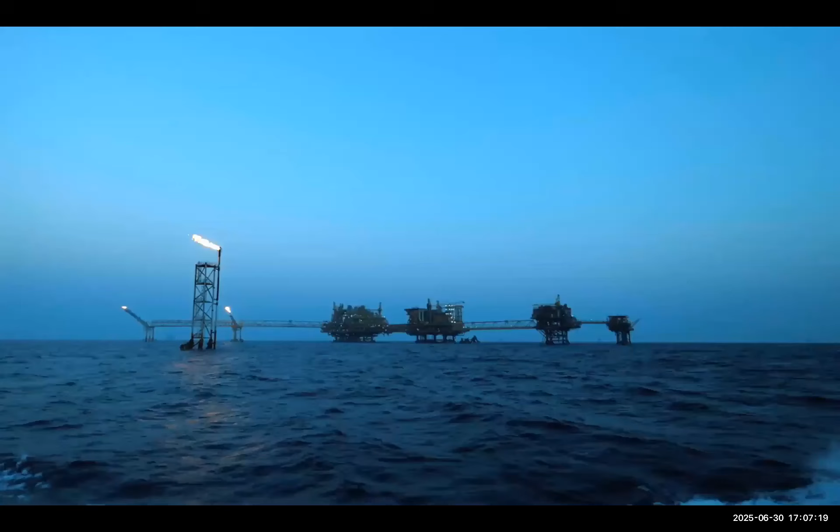ONGC, since its inception in 1956, has made pioneering endeavors to realize the vision of a proud, self-sufficient, prosperous nation by providing affordable energy, breaking the century-old myth at the very early days of its foundation that no significant oil could ever be found in India. Today, ONGC is successfully producing oil and gas from Mehsana, Cambay, Ankleshwar in Gujarat, Krishna Godavari and Kaveri basins in south to Assam and Tripura in east.

Of course, from Mumbai High, the biggest discovery made in 1974, which brought India prominently on the oil and gas map of the world, and later significant discoveries of Heera, Neelam and Ratna fields in western waters, and the Bassein field discovery in the western offshore, which remains thus far the largest gas field of India.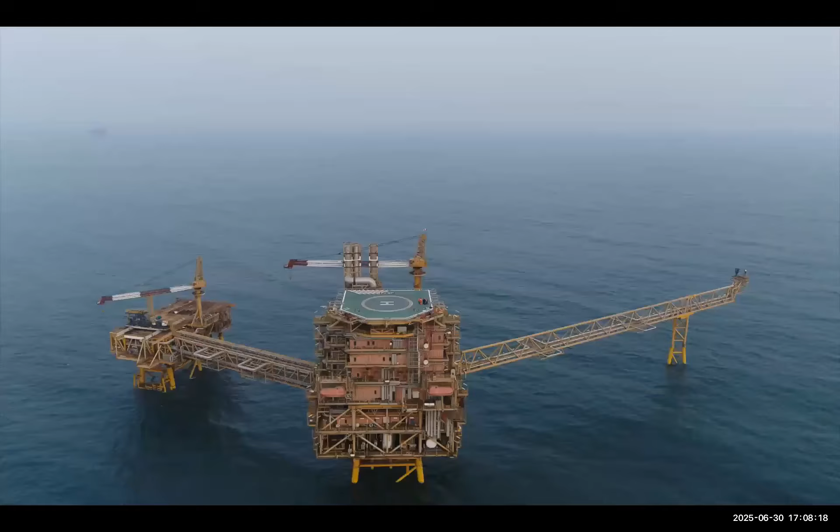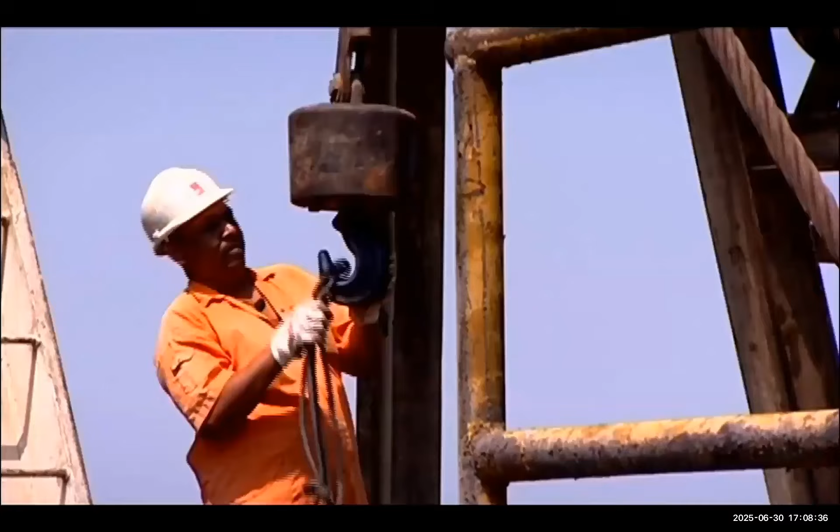Today we move further and deeper, adopting latest innovations of deep sea technologies for breaking the challenges of depth, high temperature and high pressure, to bring to production new gas discoveries of eastern offshore in Bay of Bengal and in Kutch offshore. The latest gems in the series of discoveries include the Bengal Basin that was dedicated to the nation in December 2020. The field is slated to produce rich hydrocarbons, promising further developmental activities in the region.

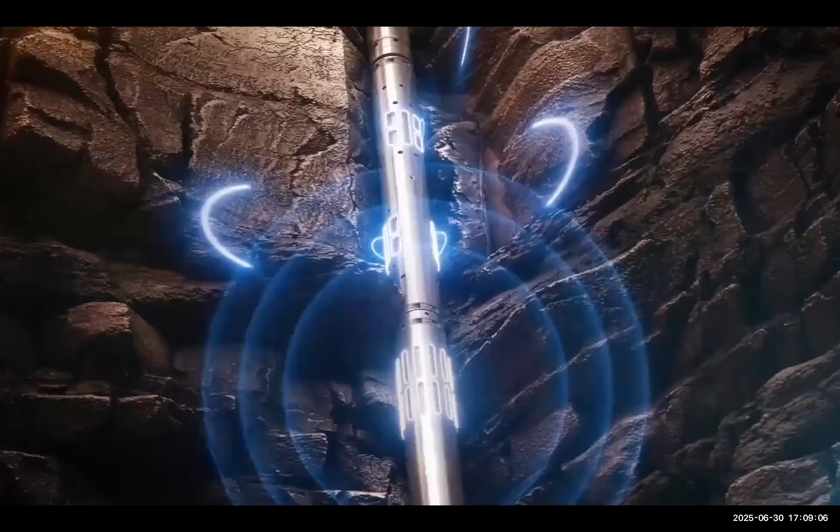This is the 7th out of 8 discovered basins of India ONGC has put to production. The Vindhyan Basin in Hatta in Madhya Pradesh is the 9th basin of India and the 8th basin discovered by ONGC, which is ready for commercial production. Breaking the technological barriers with adoption of latest innovations in oil and gas engineering and a focused and motivated talent pool, ONGC continues to be a global leader in the E&P sector and one of the most valued Indian national energy companies. An equal opportunity employer, ONGC is among the most admired organizations of the country and among the best places to work.

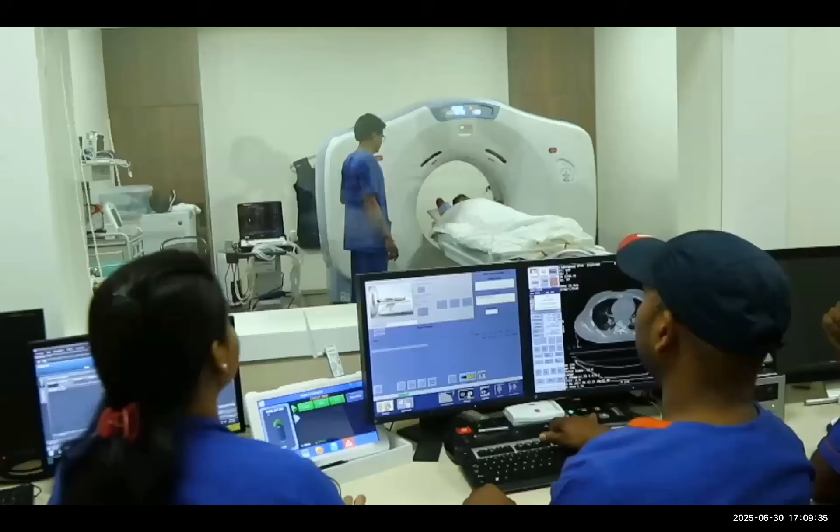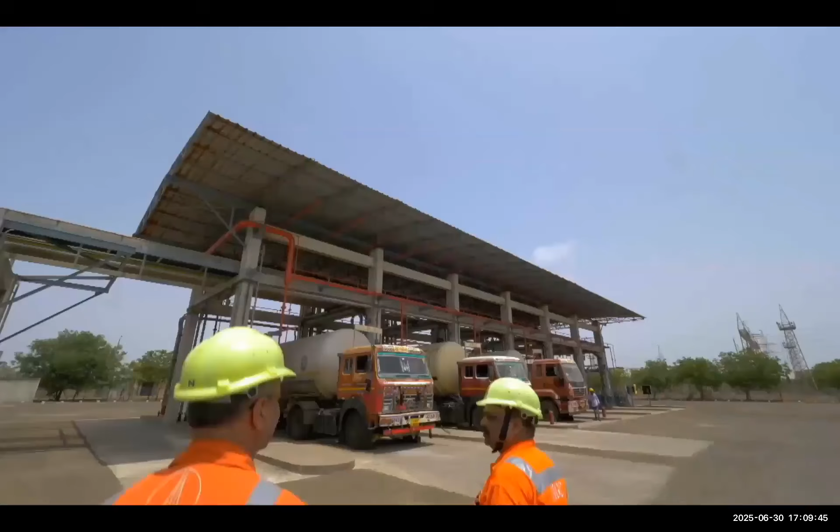In recognition of its role as a responsible corporate leader, ONGC's social outreach initiatives have made positive, tangible difference to the society it engages with, and its efforts are emulated and quoted for inspiration widely. Aspiring to establish its presence in the entire hydrocarbon value chain, ONGC has today created a niche for itself in not just oil and gas, but refining, LNG, petrochemicals and power.

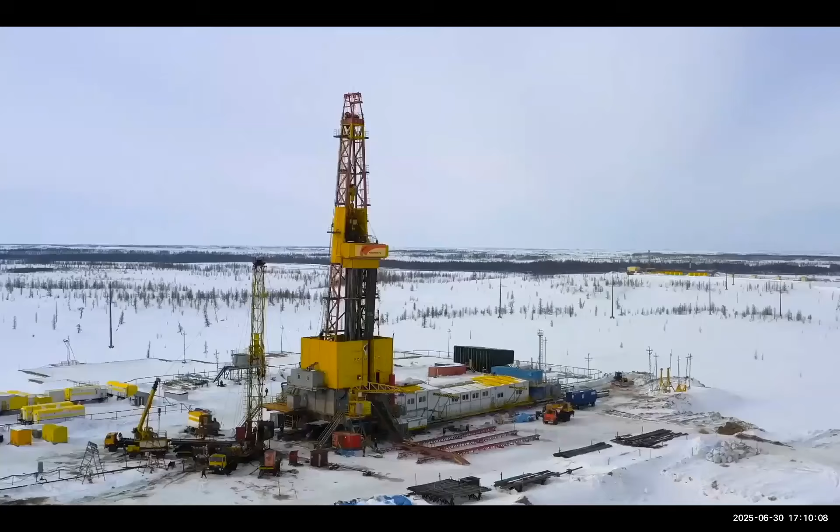ONGC Videsh Limited, the country's largest international oil and gas company, having widespread global participation in oil and gas business, has been contributing significantly to the revenue growth of ONGC. Relentlessly marching ahead with breakthroughs that fuel our journey to realize the vision of a prosperous India.